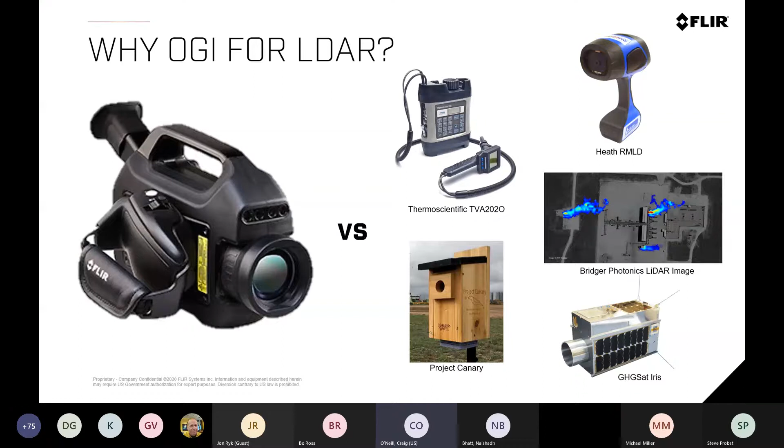When we look at other technologies, whether they're ones that have been out there since '85, or newer technologies like a satellite that Steve referenced earlier, or a box that sits next to a site just to sense gas, a lot of these are actually pretty good at the LD part of LDAR—detecting a leak, finding that there is a leak on a platform, a well site, a basin, or an area inside a 5-foot bubble. A lot of these technologies might be good at that, but LDAR has 4 letters, not 2. That's where we see optical gas imaging as uniquely appropriate for utilizing the technology in LDAR.

You've got to actually find out where that leak is. If your goal is to reduce emissions, you need to know where those emissions are coming from. This is a snippet we submitted in the Quad OA regulatory discussion that highlights how, with a swirling wind that may move at different times—we know a TVA may go 360 degrees—if that wind is swirling, we have examples of people having trouble utilizing a technology that doesn't visualize what's happening. Versus wind effects with optical gas imaging, it's super easy to detect that there is a problem, an emission, and now you know where to go to fix that.

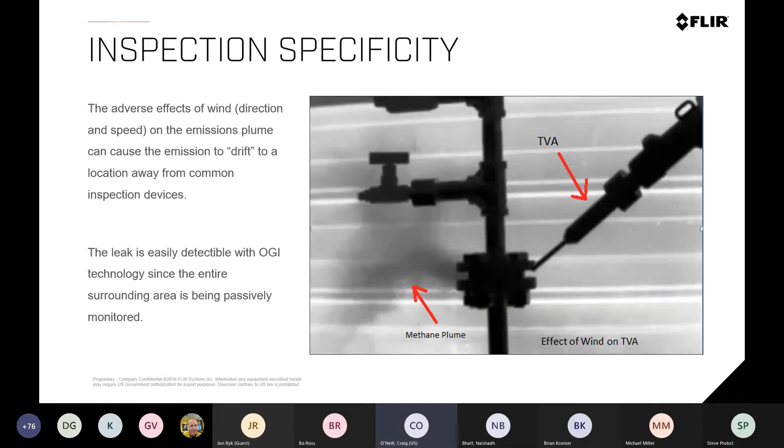You'll see this video tracing leaks to the source. As I talk a little, you'll see this gentleman look for the leaks that are visibly evident in optical gas imaging. But still, with the wrong technology, it's still challenging for them to actually detect that.

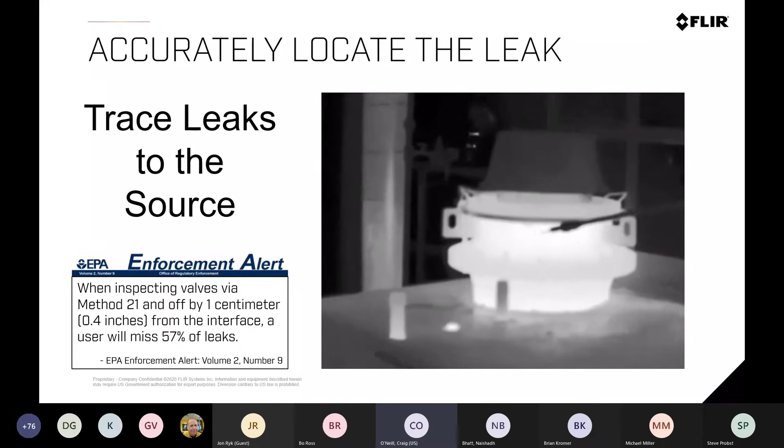According to the EPA, that would be a leak. Now, if you think about a TVA, the baseline or trademark technology since the mid-'80s for Method 21, if you're off with a Method 21 technology by 1 centimeter, you will miss approximately 57% of the leaks. This isn't just FLIR blowing smoke—this is actually from the EPA in an enforcement alert letter they had. That's a huge number with a very small distance.

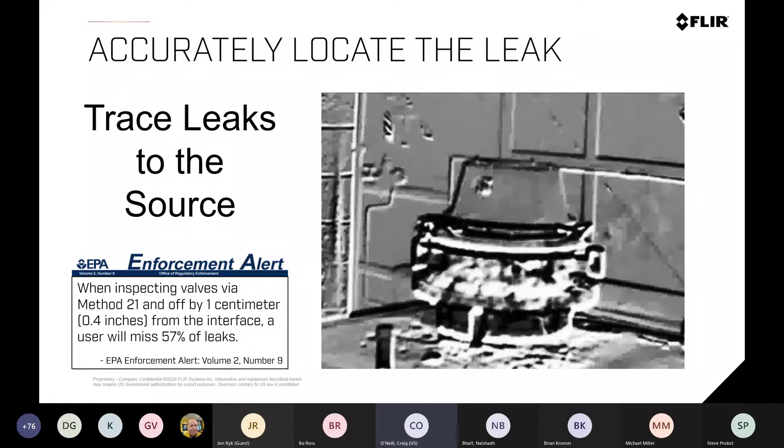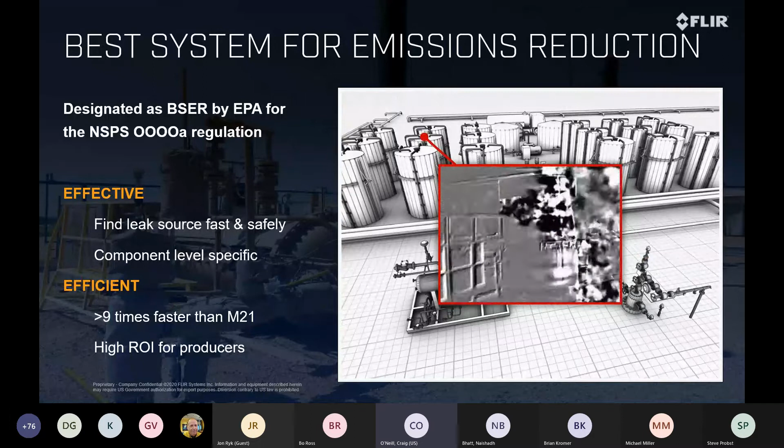Why and where has optical gas imaging gone to? We have been designated, and regulatory-wise, FLIR and optical gas imaging is fairly new to the regulatory scene. In 2005 we launched the technology, so reality is that technology-wise we are still a bit in our infancy—just over 15 years old. We have had some type of regulatory drive since 2008 when we were in AWP, but with some limitations having to utilize other technologies.

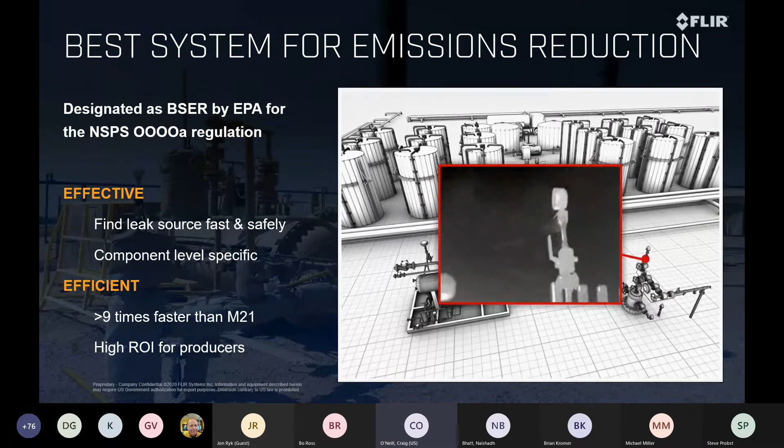It wasn't until 2016 when Quad OA defined optical gas imaging—they accepted the newer technologies within emissions mitigation and defined optical gas imaging as the best system for emissions reduction. But what does that mean? It makes our technology more effective at finding leaks and more efficient in doing it. You can actually get a higher ROI to see the leaks of where you need to go.

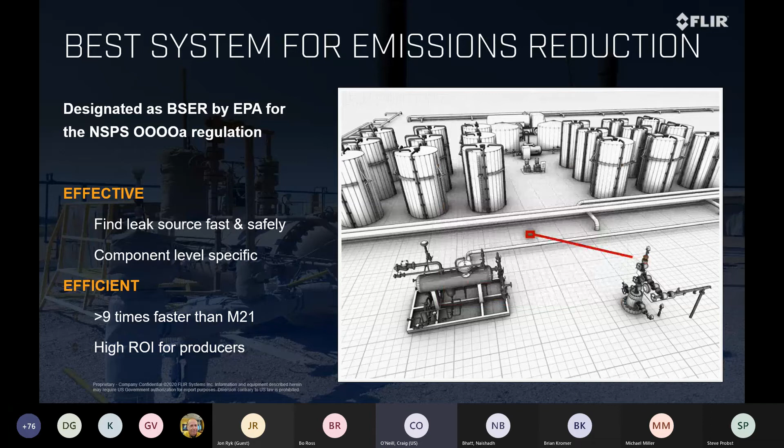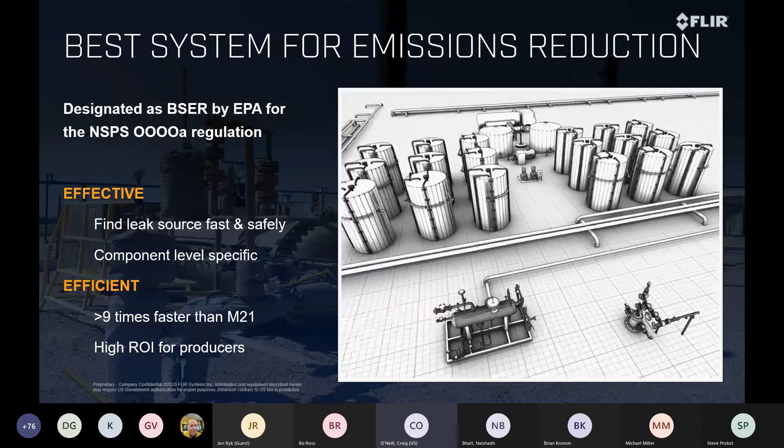We're really proud of the stuff we've looked at over the years, and not just on the regulatory side. We see a lot of organizations—a lot of the people on this call probably work for a company that 5-10 years ago didn't have an ESG and emissions reduction metrics. We're really proud to be a central part of the environment and of organizations trying to do better with their emissions reduction goals.

If we look at some of the product updates, the largest one we had this last year was the GF77. We dramatically expanded that product. It initially had a uniquely filtered lens for detection of methane and similar gases, and in essence we've doubled the capabilities of that product.

The GF77 now, simply by exchanging lenses, can focus on methane and similar gases like sulfur dioxide—gases with a similar absorption spectrum. By removing the lens engineered for methane and adding one engineered for ethylene, ammonia, SF6, and other similar gases, you can have one camera with multiple lenses and dramatically expand the capabilities of optical gas imaging.

We also sharpened the pencil a little bit on this product and made a more aggressive MSRP. Where the product was around $40,000 for methane specific, now you can choose which lens you would want for a $30,000 MSRP. So we're really proud of the expansion, if you will, broader detectable GHGs to do this. We also have 6-degree lenses that make it easier for you to look at those DTM locations and to be able to investigate or visualize.

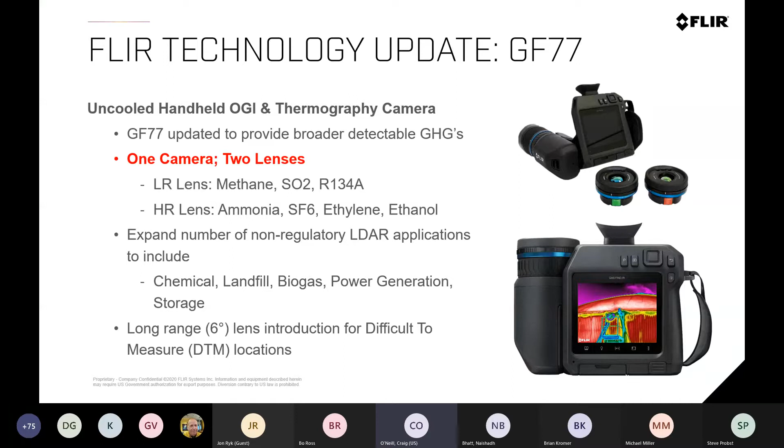If you look on this website, very simple, we have a thought leadership website called flir.com/GF77-series. You can find some information on there on the product, but you can also see a quick link to what we call 'What Gases Can I See?' It's an expanded list of detectable gases with a much easier understanding of which camera would be usable or which camera would be ideal for you to use to see this.

You'll notice any gas on here that is a hydrocarbon gas, the GF320, X320, and 620, our legacy cooled technology that would be Quad OA approved, all of those are going to have some level of detectability within this. But there is a much broader list of gases with this new uncooled solution, at different levels. So we need to understand that just because a gas can be seen with our cooled Quad OA approved camera does not necessarily mean that it would be visualized with the uncooled solution.

Of the two new gases industrially, ammonia and ethylene are probably the most prevalent. We do visualize, and one of the main reasons for making this camera, sulfur hexafluoride, which is a very common gas in the electrical transmission industry. Ethylene is used in the oil and gas industry immensely, and this camera has a very, very high absorption to ethylene within the filtered window. Ammonia is also a very common product. The new lens for this GF77, called the GF77HR lens, is going to have a lot of absorption directly in the filtered bandwidth of this new uncooled technology.

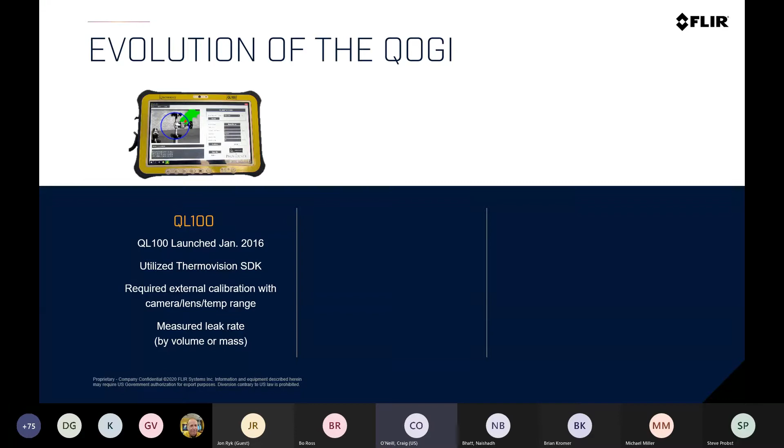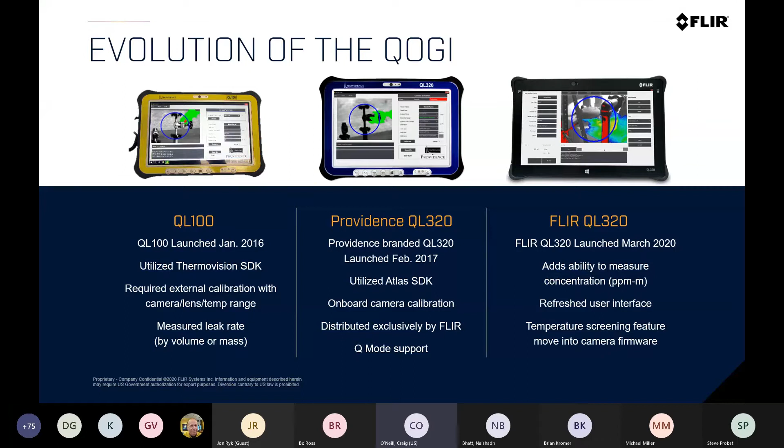We've also done some updates to the QL320 since the 4C conference last year. Some of the things we've done is we've listened to the end users. Last year we launched some stuff. We had the very first QL320 that was out years ago with our partnership in Providence Photonics. Providence came out with the QL320, the original blue one, in 2017. Then last year at the 4C conference, we launched the FLIR QL320 with a complete new user interface, concentration measurements, and a lot of new features. We've taken some feedback even since that launch and added some unique features to utilize this.

What this product is, is an accessory that works only with our cooled system. It will not work with the previously mentioned uncooled GF77. It's only going to work with our legacy cooled technology and allows you to quantify gas emissions from afar. You can do this for DTMs, with either mass or volumetric emission rates if you're looking for that. But the new feature we launched last year is the ability to use this QL320 to get a concentration reading in parts per million over a meter path length.

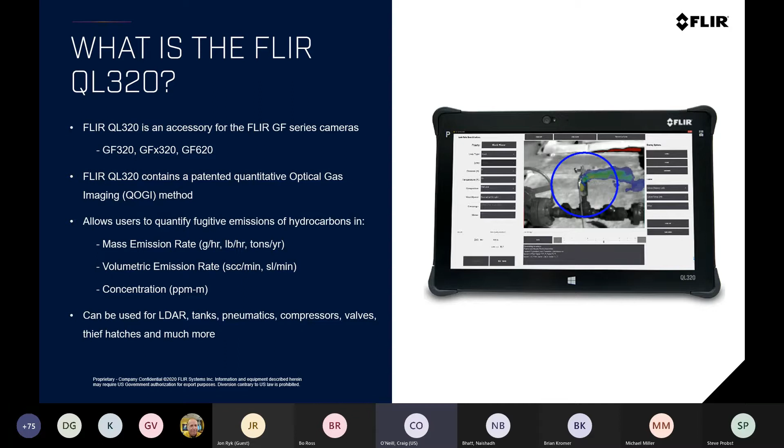This can be used in LDAR, just general optical gas imaging of tanks, pneumatics, compressors, valves, thief hatches. But you can also use this for other purposes. There are some organizations or federal agencies that do allow the QL320 as their quantification metric device in meeting regulatory demand. There are two ways to use the QL320.

We do have our tethered connection that gives you a little bit more immediate feedback, as well as some expanded features because you're utilizing the tablet in the field. But we also have our Q mode. That's actually just a mode in the camera. If you have a FLIR camera, we can upgrade your camera to Q mode. It is a mode within the camera that allows you to store the files so they can be post-processed within the QL320, whether it's in the truck right after that, or whether it's in your office in a comfy chair out of the cold weather later that day or at another time.

You can do this both tethered or untethered with our Q mode. Please note that no matter how you use the technology, you would need a tripod to stabilize the image so that the algorithm could work appropriately.

Some of the updated user interface—we've got user data inputs on the left. All of these are standard, just put into a new GUI. We've got some masking features that make it a little easier. We can have multiple masks, and if you're using volumetric or mass readings, you can use multiple masks if you have stuff in there that maybe has reflectivity or doesn't have the appropriate delta T. There are various overlays, including the delta T overlay, which helps you understand what part of the image can be quantified, and that works also in our Q mode feature.

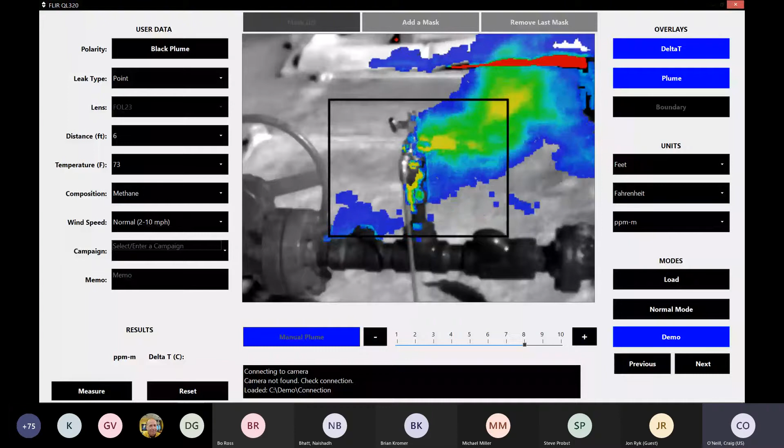Right now, this video is running in the QL320 through the parts per million concentration reading. I'm going to tap measure on the bottom left. Now it's actually running that file—it doesn't do anything until you ask it to measure. So now I'm going to tell this to measure and run that file. When it's done, it will give me an accurate reading of the QL320 output for concentration, and this is approximately a 26,000 parts per million meter leak with the user input data that I have set on the left.

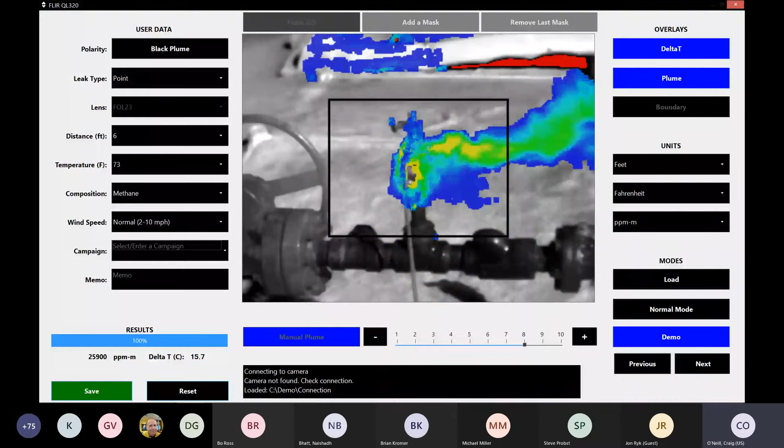Now, if I tap next, you'll notice a lot of the user data will change in accordance with the way that this previous file was recorded and set up. I can now show you that with something like this, I can change it from—I'm going to go with standard cubic feet per hour—and I can add unique features.

Now you'll notice that as you move out of the concentration reading, you have a blue circle instead of a black box. The blue circle is what is actually measuring this, and you'll notice that I have the delta T overlay turned on where you can see the red of that.

Maybe I want to actually take that red out of any readings. I can turn a mask on—let me see if I can add a mask. Add the mask and be able to actually exclude it. Now this really doesn't matter because this leak isn't moving across an area that has a delta T issue, but there may be scenarios where this leak may be floating across an area where there are potential delta T issues, and you can remove that delta T area that would have an error reading within it.

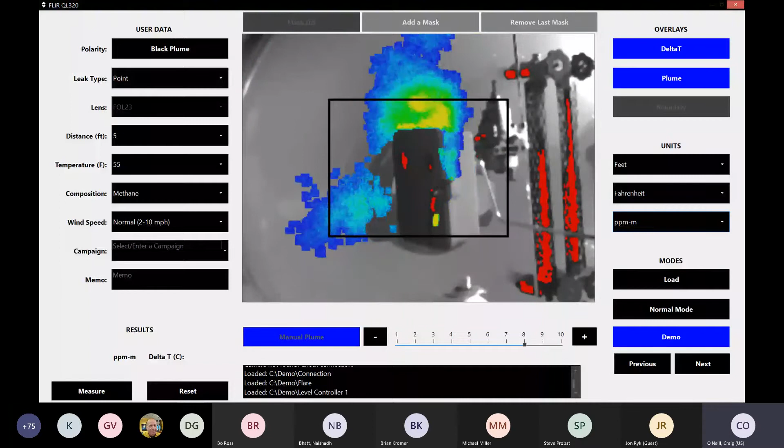The other unique thing is if I go back over to another leak here and look at a concentration reading, I don't have to take the reading—what this is actually reading is the maximum concentration reading within that box. Now, if I notice an image like this, and one of the things we'll talk about here in a minute, you want to remove any foreign objects inside of your QL320.

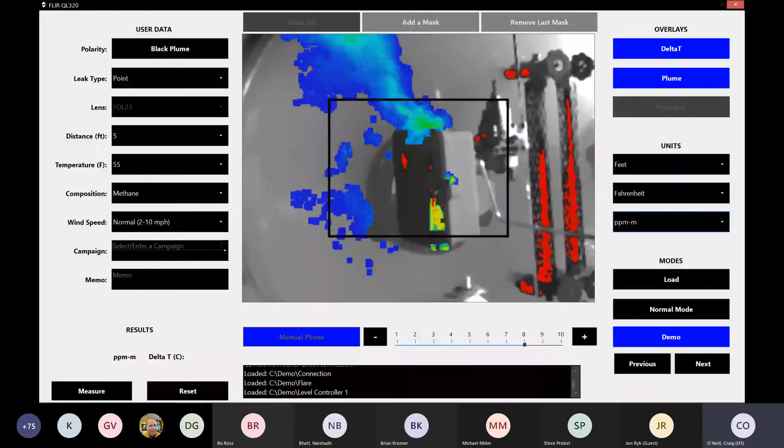So I'm going to take this box and make it, excluding the hanging key or tag that is part of the actual controller. Now as I go back and hit measure, this is taking the maximum reading inside this box as that leak is moving around. I apologize, it's a little delayed on the video I can see on the screen here, but this reading is around 3,500 parts per million meter leak, the maximum reading within that box.

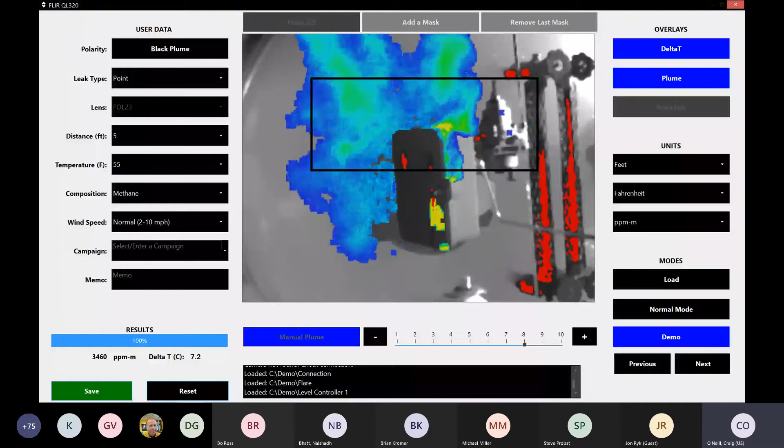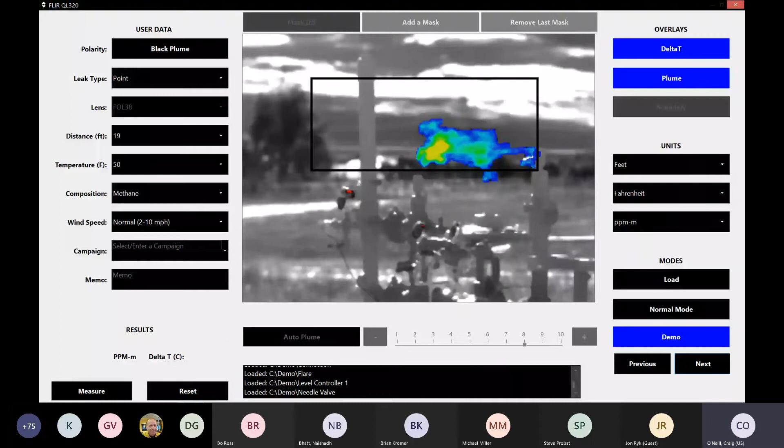In a unique situation like this, if I didn't have any issues with hanging tags or delta T's, you could literally take this box and make it the entire screen. As long as you had no interference, the unit would be able to take the maximum concentration reading within that box, and in essence, in a video like this, the maximum concentration reading within the entire screen. Again, there are no foreign objects, like a hanging LDAR tag or a key hanging from a controller opening. This gives you a more accurate, more unique way to look at this because it's taking the entire screen.

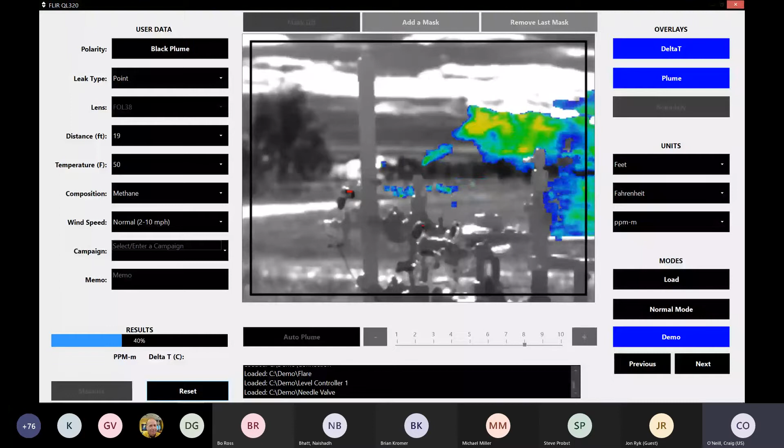All this is just to show you, we've got about 10 different ways to utilize this in demo mode, even visualizing thief hatches to see leaks and readings within thief hatches and various other operations. Due to time, I'm not going to do a more expansive training on this, but we do have some training online of previous presentations we've given on flir.com, under our training section.

So now I'm going to jump back over to make sure we can visualize this. I'm going to jump back over to my desktop here.

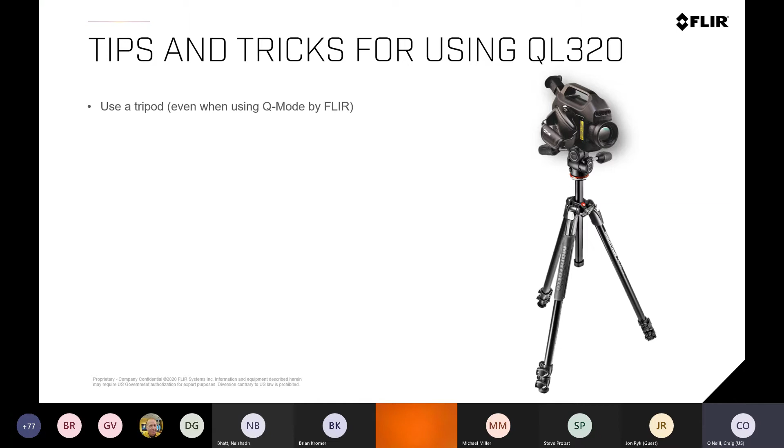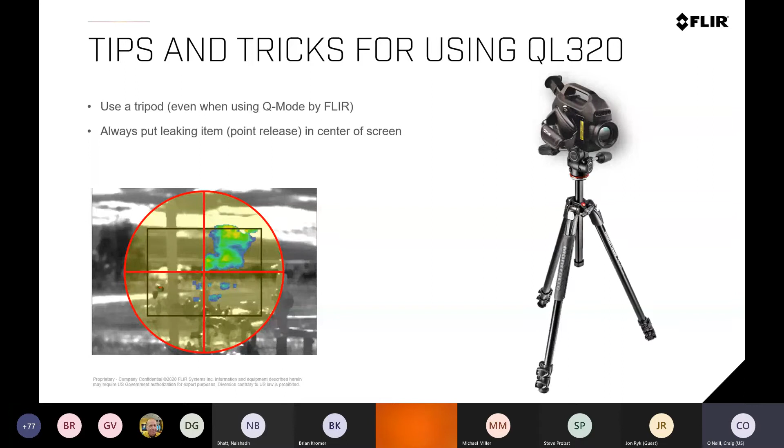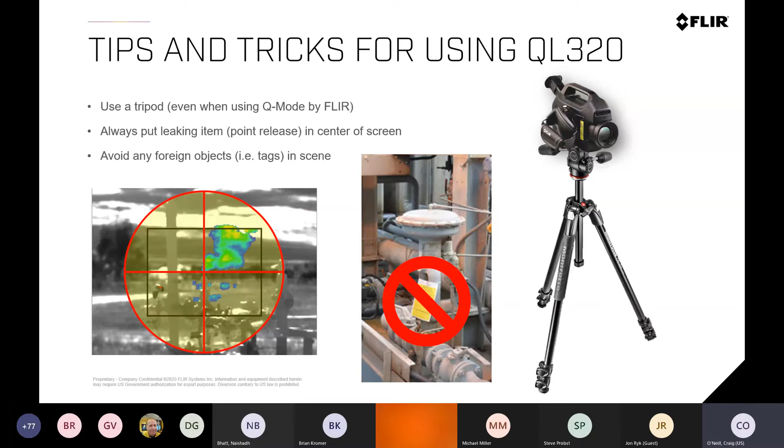There are some quick tips and tricks to understand in utilizing this QL320 solution. One is you always need to use a tripod. The way the algorithm works right now, and we're working with our partners Providence Photonics to try to eliminate this in some ways, the unit has to be stabilized. You want to ensure, especially if you're looking at volumetric and mass readings, that the center point of the leak, the leaking origin point, is in the middle of your screen. You also want to ensure there are no foreign objects, like an LDAR tag or anything like that, hanging from the scene, because if that is hanging there, the camera and the algorithm within the QL320 would visualize that as potentially being an actual moving pixel or a leak, which would present a dramatic error in your reading.

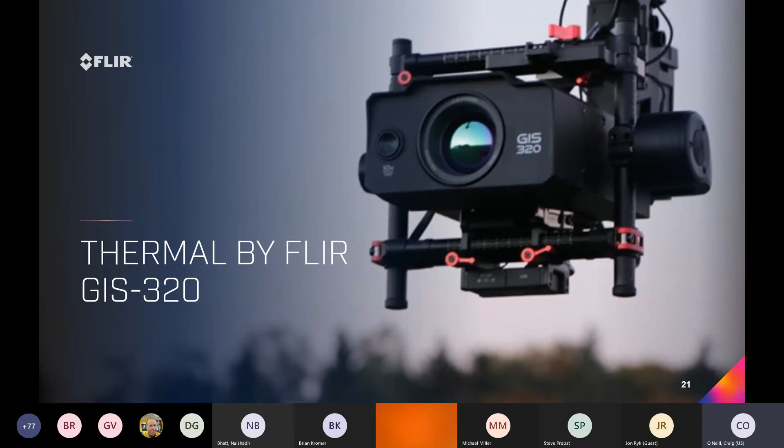The last thing I want to introduce is the new Thermal by FLIR GIS 320. There's an organization called Workswell that we partner with out of Europe, and they've taken our technology and put it into a plug-and-play gimbalized unit for optical gas imaging with our cooled solution. The detector inside here is the same detector, the same engine if you will, that we use, and it is actually Quad OA approved. A G300A is the same detector, engine and everything as a GF320, GFX320, and we have that built into this payload that is really drone agnostic.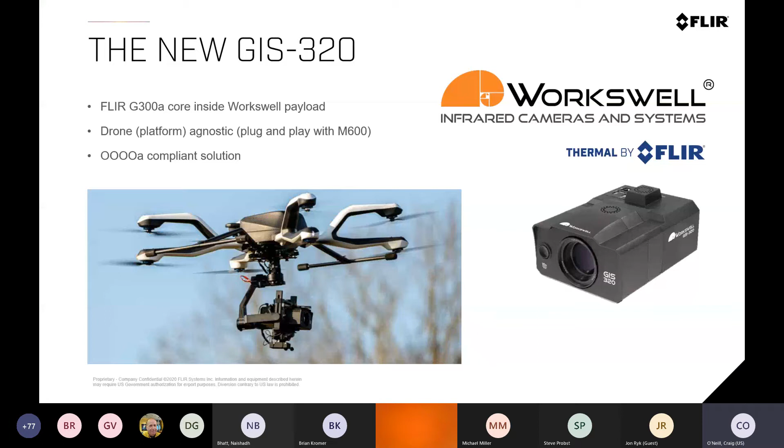It does work, and there is a direct plug and play that you can use with an M600, one of the most popular drone solutions out there. Again, this is a Quad OA compliant solution because the engine inside of it is just utilizing our G300A.

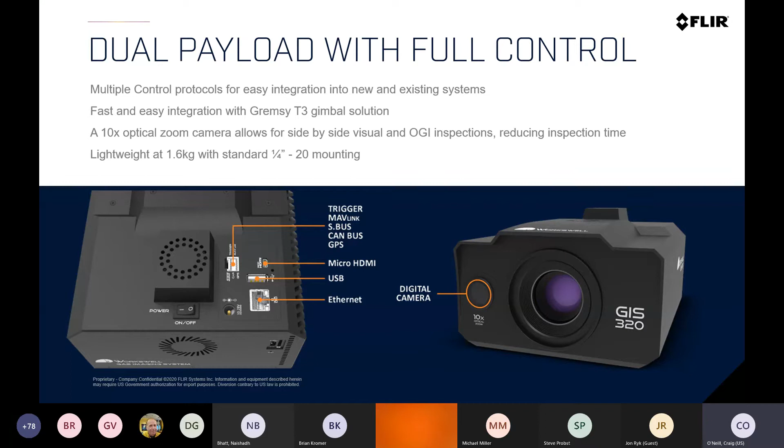Some of the stuff you get with this, where our partner Workswell has put together a unique thing, is that there's multiple control protocols. If you go with Gremsy, it works with just an off-the-shelf Gremsy T3 gimbal. It does have an optical visual camera with a 10x zoom so you can hover over, find a leak, and hopefully even see exactly what's leaking and document that. It is extremely lightweight, compared to a lot of drone things, maybe 'extremely' is a stretch, but for an optical gas imaging cooled solution, they've really streamlined this and made it a pretty lightweight solution for a heavy industrial application.

And lastly, we have other people out there, and FLIR does have the capacity and capability of providing sensors to do more than just optical gas imaging. You can combine FLIR needs, combine your needs and applications. As an example, you can use the same general security camera to do tank level inspections.

You could put this either on a pan and tilt or even on a fixed mount. There's a company we're working with in Colorado called CleanConnect.ai, and they're utilizing our cameras, our very off-the-shelf security cameras.

They do tank level inspections with percentage. The numbers there are the tank number, and the number on the right is the percentage full that tank would be. Again, of course, you could mount next to this.

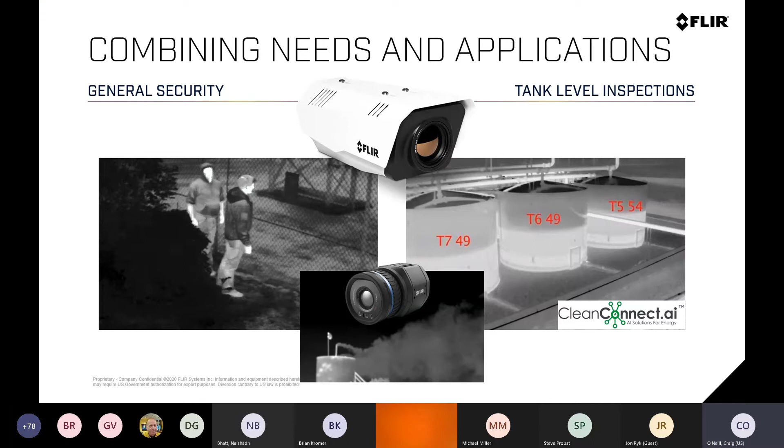You could do this in tandem with an optical gas imaging camera to make sure that you can reduce emissions, whether it's our new uncooled solution that may not meet regulatory requirements, but would help you meet some of your internal emission metrics in reducing methane emissions.

This is a complete solution. We'll work with you, or CleanConnect would work with you. We provide the solution to say, what's wrong? What do you need done? We'll work with the solution and say, here's the plan.

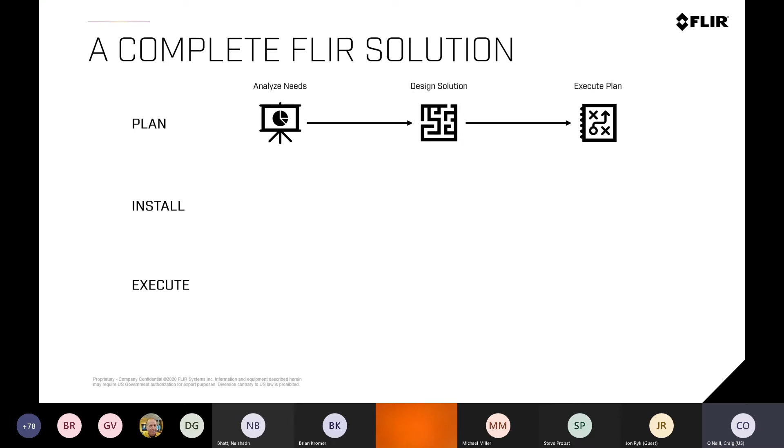Once we find that plan, we have partners that integrate this technology to get the communications, install the systems, and make sure that all the technology, from how it's communicating, how it's powered, to the units itself, are working. And then making sure we execute on the desired need within the camera.

Are you looking for optical gas imaging, tank level monitoring, security, all three potentially? Again, utilizing the umbrella underneath FLIR, we have a great technology, and then package all that together in a UVMS so that you can see what's happening.

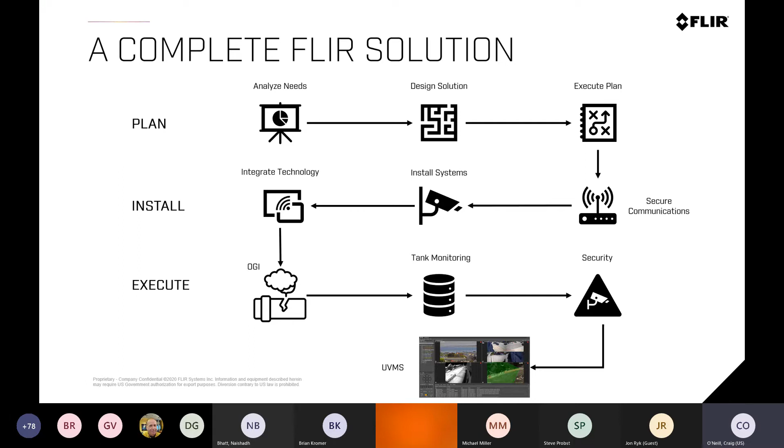So again, we have some of this technology. We've got partners that have streamlined this and kind of put it together in a nice package as well.

If we look at kind of an upstream platform, you could potentially use a radar to detect if somebody was approaching your facility. And at that point in time, you could either do a pan and tilt to confirm, is that a human or a dog or a deer, or what's going on at different areas that radar could detect, or maybe have security or tank level solutions on the outside or external of your facility.

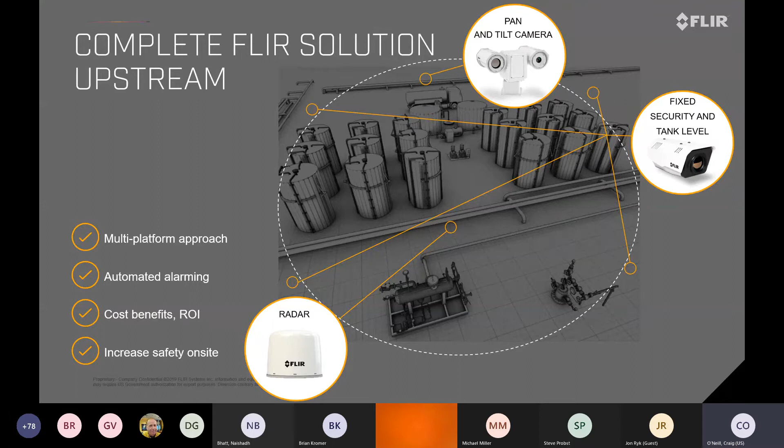Of course, you could do a fixed OGI solution to look for leaks at important areas within the facility. And then once you find that, again, that LDAR piece, whether you're using optical gas imaging, whether you're using a satellite, whether you're using other types of technologies that may not be FLIR based.

The optical gas imaging camera is going to be the most critical solution that's out there in the market for detection and repair, because you need to know what's leaking, where it's leaking, and where I need to go. And the optical gas imaging solution does give you that unique capability.

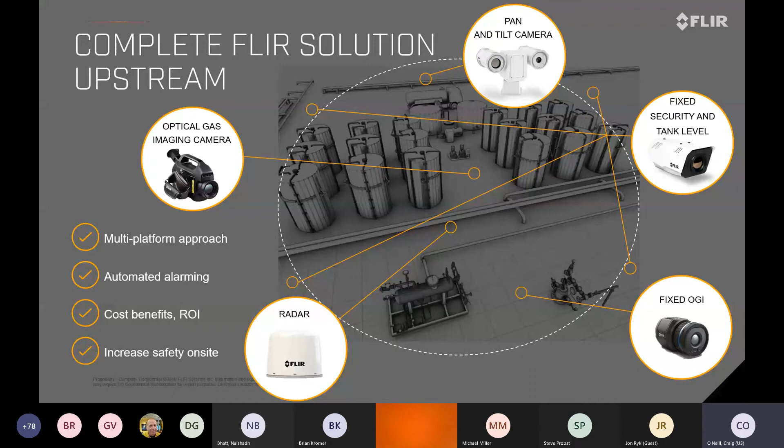I tried to keep this right around 30 minutes, and I think I did somewhat okay. And Steve, I don't know if there are any questions that we'd like to kind of get at here and discuss.

Yes, there have been a few questions asked in the chat. Okay, are the security settings on the left configured manually or set by the system?

Those are going to be configured manually within this. So if you're using either the QL320 tethered in the field, or you're using the camera in Q mode, if you're using the Q mode in camera, you have that capability, or not capability, it is a requirement to input those things.

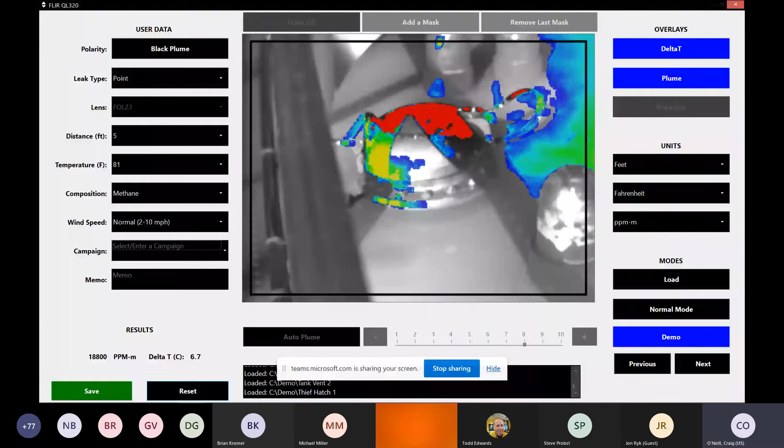The camera and the tablet, neither one of them know what type of leak it is. You need to define that. They don't know what ambient temperature it is. And again, we're looking at streamlining that. They don't know the distance you are away, or realistically, the main gas within that composition.

And so you do have to manually input that. Now, it will automatically input the lens that you're using within the camera, because that's just a binary setting within the camera. But the rest of the stuff you do have to input.

Now, the unique thing about that is you can also edit that in the QL320 after you're done with the Q mode. So if you did accidentally record the wrong input data, you can actually fix that when you run the analytics within the QL320 in your Q mode file.

One other question was, how does it calculate the emissions? And I don't want to get too much into the technology, but if there's a brief version of that answer.

Yeah, that's a little bit challenging. There is a unique and proprietary algorithm inside the unit that's calculating those emissions. If you put it simply, it's looking at pixel intensity, and as that pixel intensity changes, taking into account the temperature in the background, as the intensity of that pixel changes in correspondence, that's why the camera needs to be still, and corresponding with the background temperature, we know as that singular pixel changes in temperature, it's changing in its intensity.

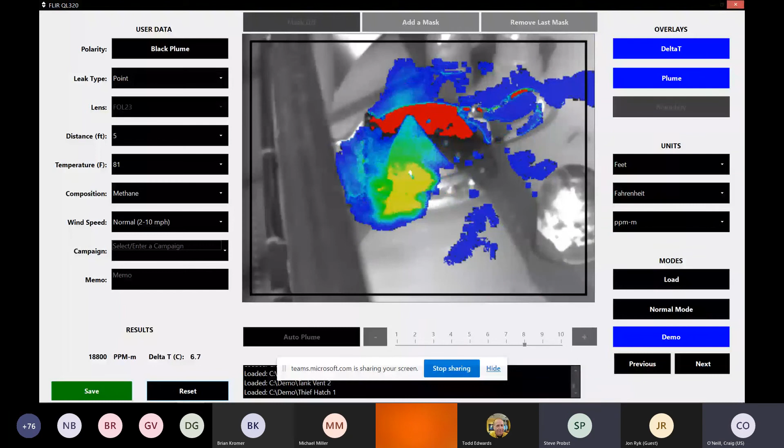Here's another question. Interested in both stationary OGI and airborne UAV-based OGI, and some discussion of what stationary can do versus mobile airborne and the limitations of each. Yeah, so in essence, our stationary unit, our G300A, it's not ruggedized, it's not in a unique housing, it's not really mobile. It's the same camera.

Keep in mind, our G300A cooled stationary unit is going to be the exact same engine, the exact same detector that is in our UAV unit. Now, the UAV unit, because of its packaging and housing, is going to be a little bit more expensive, but that doesn't just have to be a UAV. You could put that on a robot, you could put it on the hood of your truck if you wanted. It can be in other platforms that need a more robust stationary type of housing like you'd get on a UAV. But we do actually have an enclosed option — you can put our G300A in an enclosure and have a fixed mount solution.

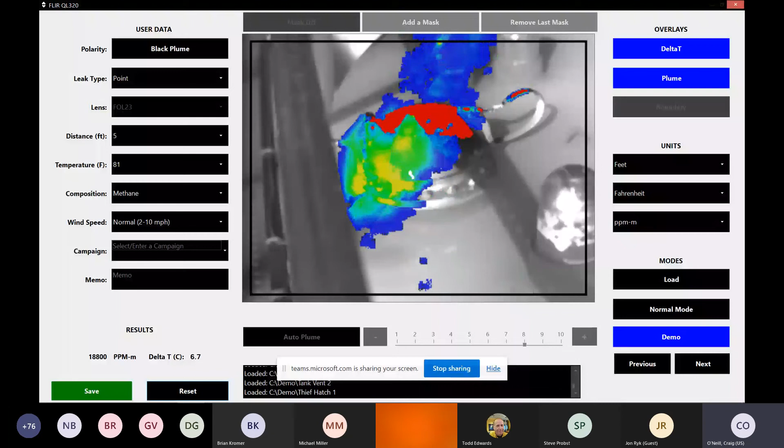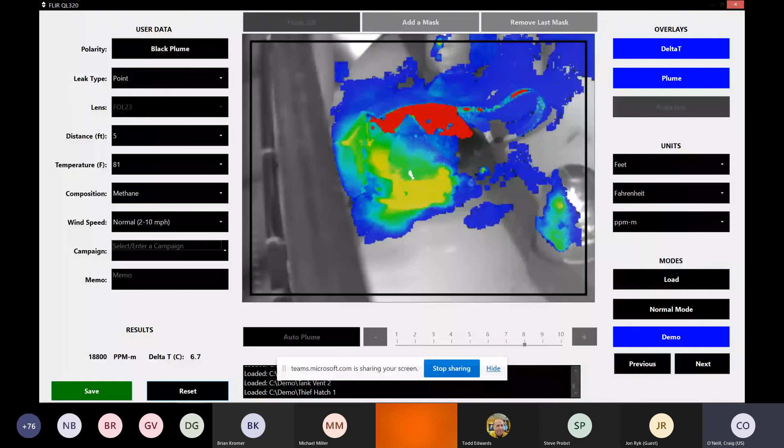We also have our uncooled solution. Again, that is not Quad OOOOa compliant; it's not the legacy camera for optical gas imaging that people may be used to. We do have a Quad OOOOa, and a non-Quad OOOOa compliant GF77A that is more specific with methane in its LR version, and ethylene and ammonia in its HR version.